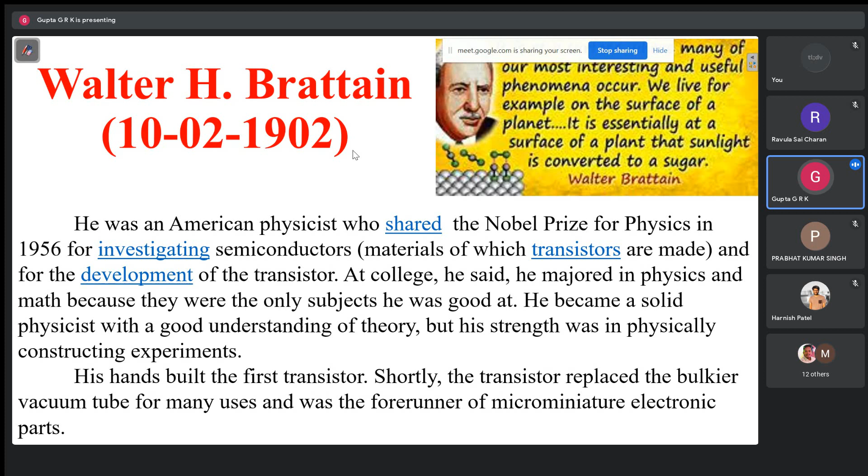Okay, today we will continue with centrifugal compressors. In the last class, we discussed how the centrifugal compressor works, and we compared the centrifugal compressor and axial flow compressor. Then we discussed the nomenclature of the centrifugal compressor. So as I had told you, at the inlet, first it enters the bell mouth to make as much air that can be sucked into it, and to have a smooth uniform flow.

And then there may be or may not be IGV, which are called inlet guide vanes. Then it enters the eye of the impeller. At the eye, first it enters the inducer of the impeller, the inducer part, which is the transition piece that converts the axial flow into centrifugal radial flow. Then we have the impeller, and this impeller also will have an impeller exit, which can be radial, backward curved vanes, or forward curved vanes.

And after the impeller, there will be a vaneless space between the impeller and the diffuser. Then we have the diffuser. And then all this flow is collected in the volute casing with increasing area, and it comes out to the exit. So these are the things we have discussed. And then we have seen how the properties vary across the impeller and diffuser. Mainly, the difference between impeller and diffuser is that the impeller is rotating and we give work to it.

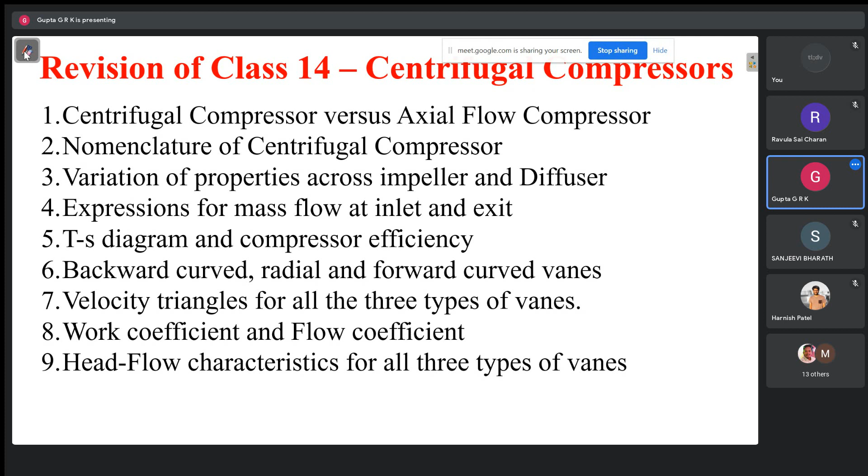Okay, we'll continue that. We are going to introduce some concepts today.

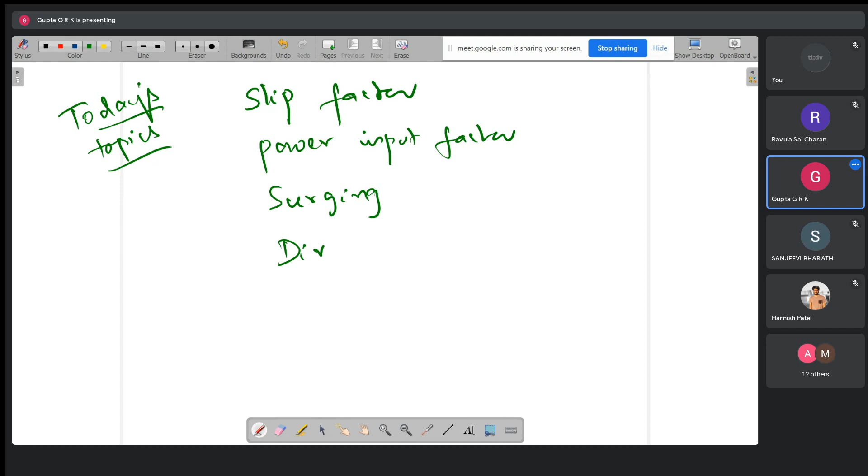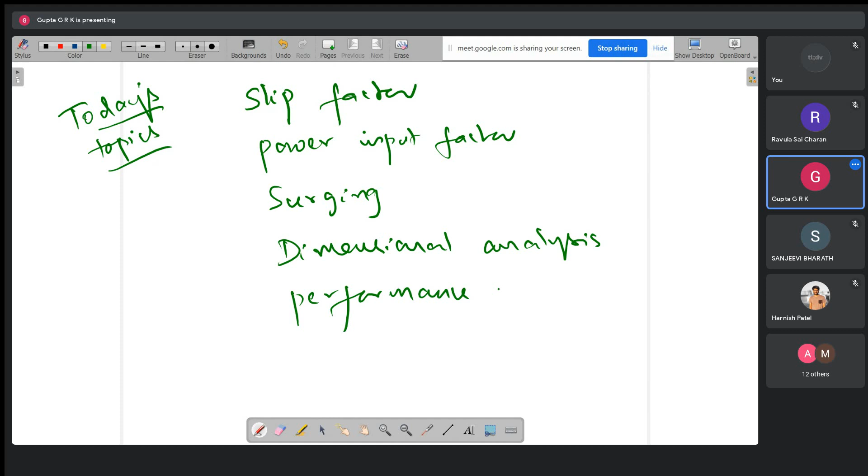One is slip factor, and another is called power input factor. And surge, and dimensional analysis, performance characteristics. These things we are going to discuss. And another thing, prewhirl, this is another one we will discuss. One by one we will go through them.

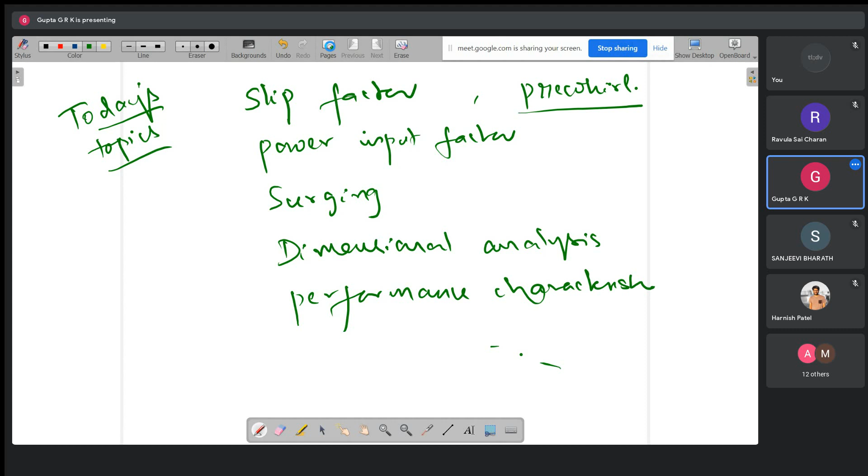So coming to what is called slip factor. See the exit whirl component, which is CW2, we design for a particular value of CW2, because the work is equal to U2 CW2, and it is designed like that. But somehow when it is calculated, or when it is measured, it is always found to be less than predicted.

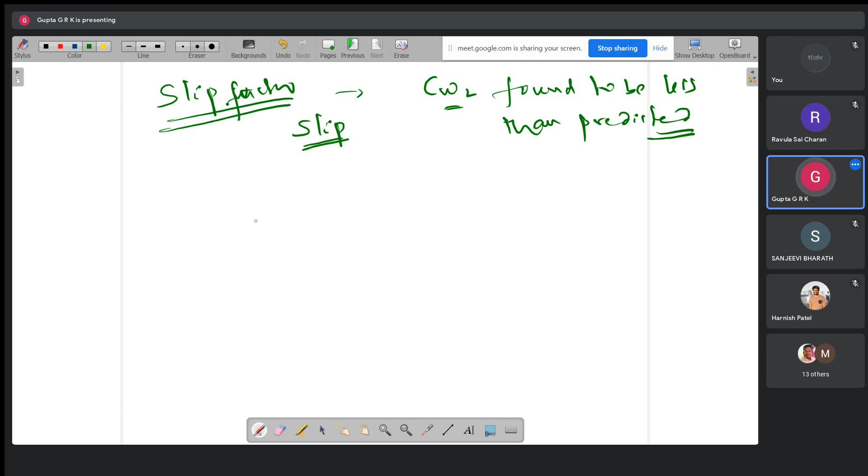So for a few years they didn't understand what was happening like that. Then they came to understand that there is what is called slip. What is this slip?

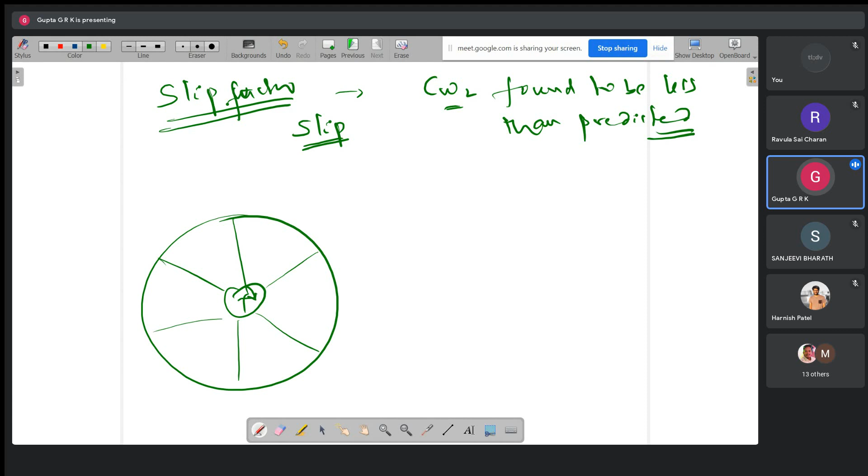If I have something like this, a radial vane impeller, suppose if I take it this way, if it is not rotating, something entering at the center is going to leave like this, this is called through flow. It has to just go out radially outward. But because it is rotating, what happens is...

Because of the inertia, when something is trying to rotate this way, it tries to resist, and there will be an opposite spin on every particle. It's like when a car is going forward, you are thrown backward. So everything will try to spin in the opposite direction because of its inertia, and every particle will have an opposite spin induced due to inertia. All these spins of the particles will form like an eddy.

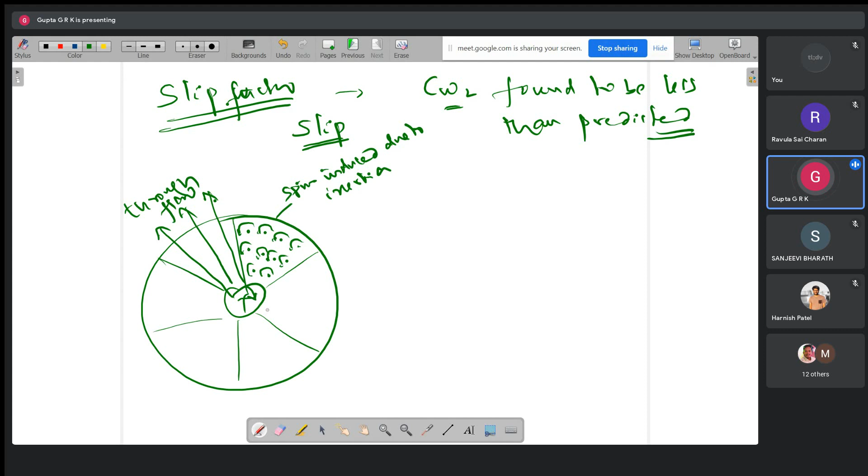So it forms an eddy. This is called relative eddy, due to the induced spin. So it forms like an eddy there. This eddy has velocity in the tangential direction, but in the opposite way. So what happens is, I have the velocity this way, but here the velocity is in the opposite direction.

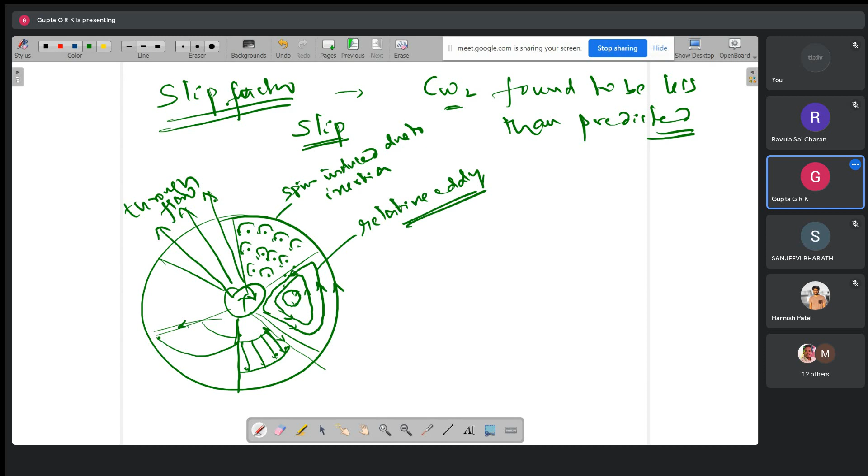So here instead of, suppose if I take the velocities uniform this way for the velocity distribution, but now what happens is, near to this there will be opposite velocity, but near to this there will be induced velocity in the same direction. So there will be less velocity here and large velocity here. The velocity distribution will be like this, instead of this way. Forget about that, it's not that important. The important thing is there is an induced velocity, a tangential velocity, opposite to the direction of rotation.

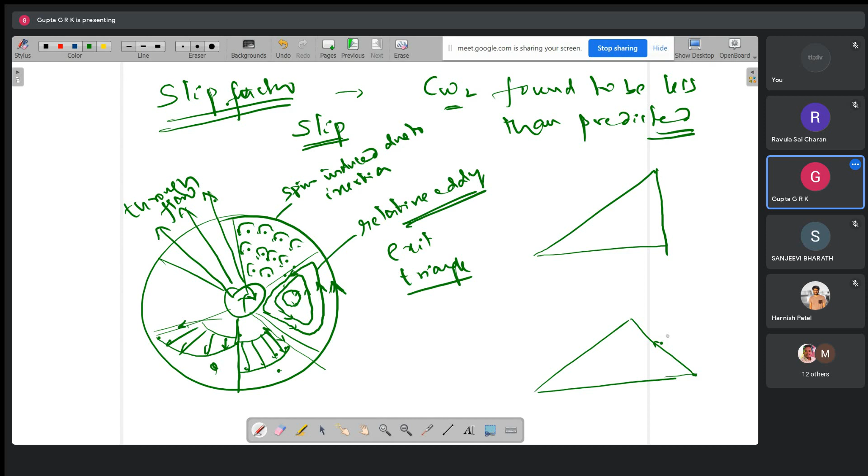So if I have the exit triangle, if it is a radial vane, it is going to be like this. If it is a backward curved vane, here what happens is, because of this tangential velocity which is induced in the opposite direction, instead of this much of CW2, I will have less.

So that induced tangential velocity is called slip velocity, which can be written as Vs. So here this will be Vs. Now this will be C2, and CW2 will be only this. This is CW2 with slip. CW2, yes, I will write.

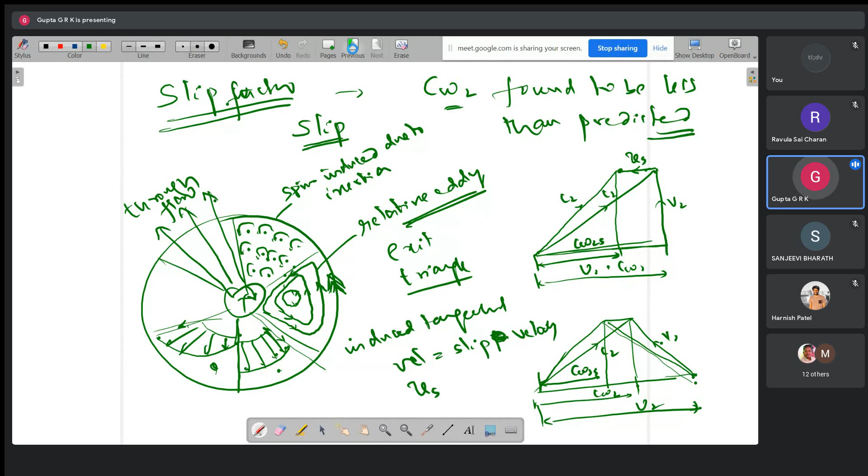In the same way here also, it will be like this. U will not change, right? So CW2 with slip will be less, like this. There will be a decrease in the CW2 we get. So that is defined as what is called slip factor.

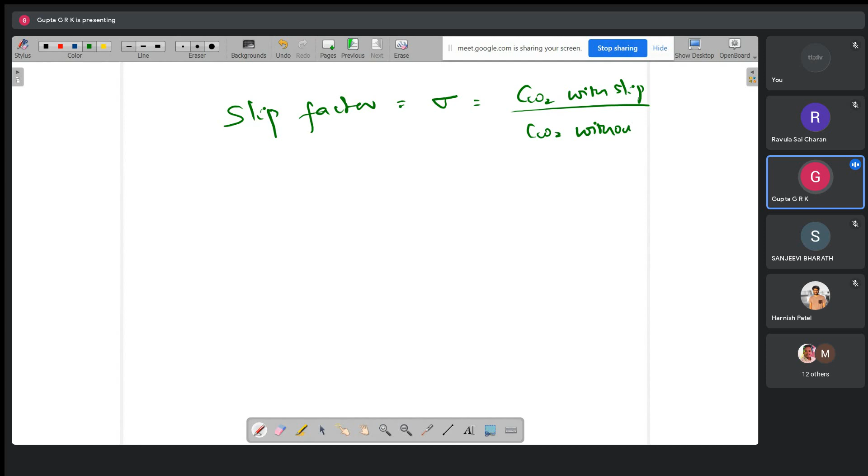This is given by sigma is equal to CW2 with slip and CW2 without slip. It is CW2S by CW2, or CW2 minus Vs by CW2, or 1 minus Vs by CW2. So this is the way they defined what is called slip factor.

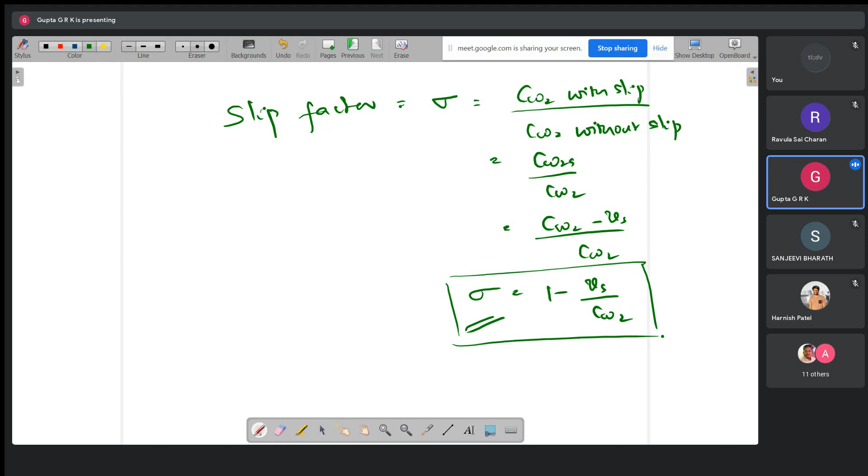But now the question is how to quantify it. It's not enough if you qualitatively understand, because we are engineers and designers. We want to quantify everything. So how to quantify this slip factor? This is done by a scientist called Stodola.

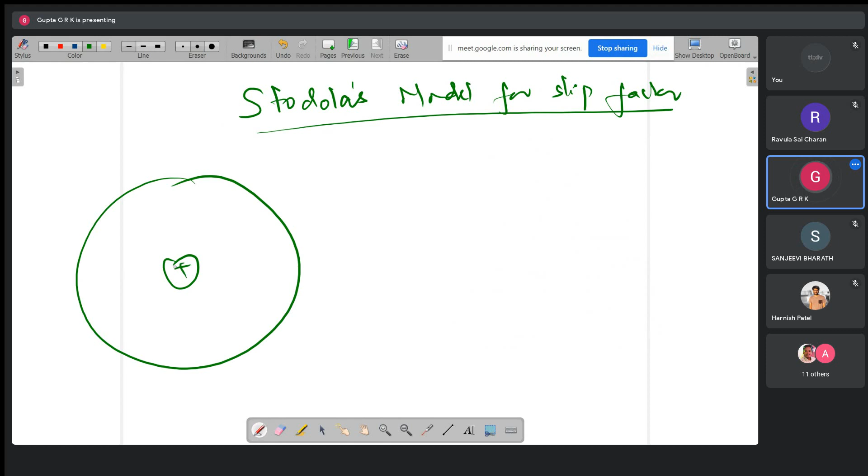So what he has done is he has taken a backward vane thing like this, and he has assumed the relative eddy, the largest circle whatever is possible, he inscribed here. So this is like an eddy motion, rotating in this direction. Its angular velocity will be omega only, and he wants to find out what is r here.

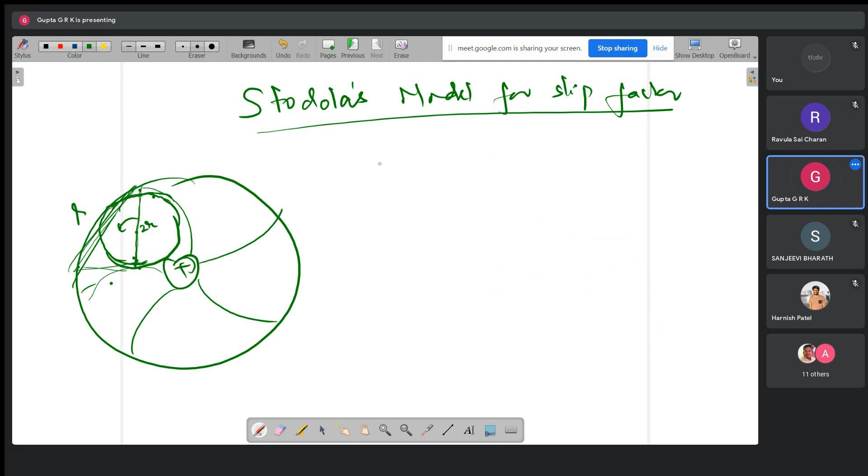So he has expressed this as a right angle triangle like this. If I take the radius of the relative eddy as r, this is the diameter 2r, and this is pitch s, the distance between two successive blades. So s is equal to, because impeller diameter is r2, 2 pi r2 by z. Z is number of blades, S is pitch of the blades.

And R2 is impeller outer diameter, impeller tip diameter, like this. So S is like that. And this angle, this is beta 2, because this is the exit angle, right? So this angle is beta 2.

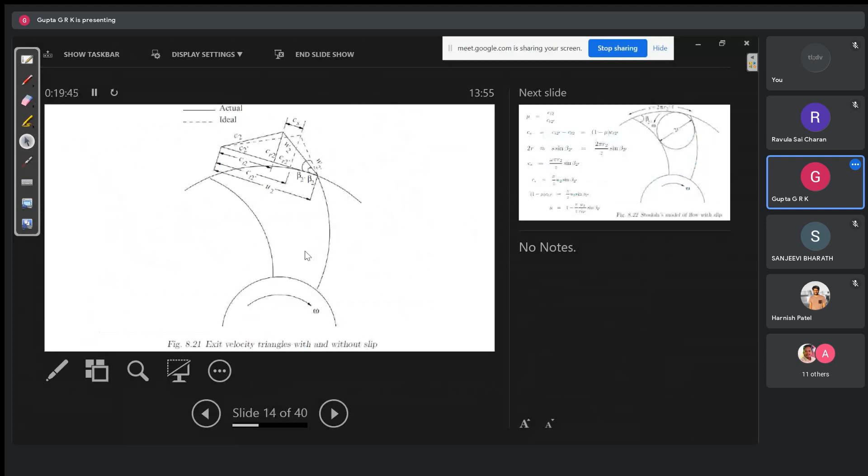And if I take like that, so I can write this as 2r is equal to... this is 2r, yes. If this is beta 2... Okay, he has taken this as beta 2, this is S. So here, because this is beta 2, this is the opposite side, 2R is equal to S sine beta 2, approximately equal to S sine beta 2.

Then Vs is equal to R omega, where R is radius of the eddy. So from this, R is equal to S sine beta 2 by 2. That is Vs. And S is 2 pi R2 by Z. So omega sine beta 2 by 2 into 2 pi R2 by Z. So this 2 goes off, and omega R2 is equal to U2, blade velocity. So this can be written as pi U2 sine beta 2 by Z. So this is slip velocity.

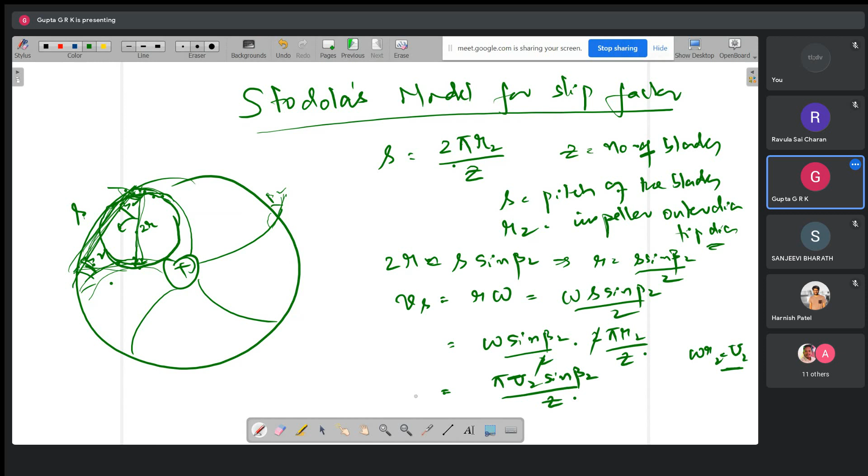And then this is slip factor: 1 minus Vs by Cw2. That is 1 minus pi U2 sine beta 2 by Z.

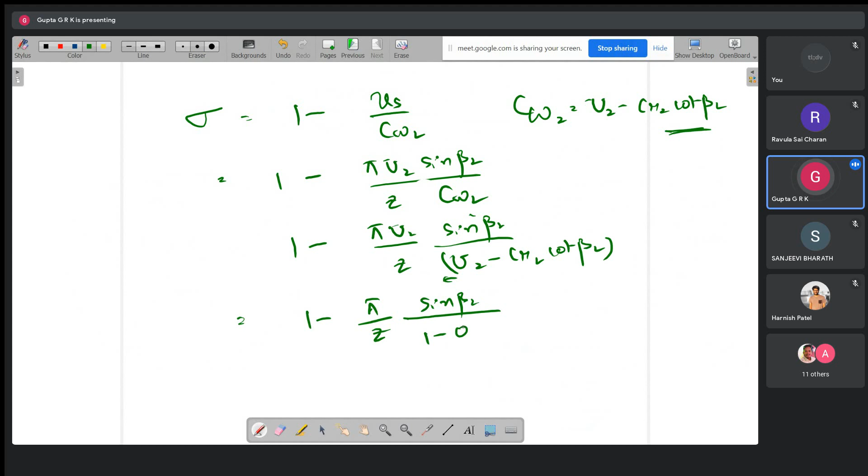Cw2 is equal to U2 minus Cr2 cot beta 2, as we saw yesterday. If I substitute that here, and similar to yesterday, take U2 common and cancel U2 in numerator and denominator, this can be written as 1 minus pi by Z sine beta 2, divided by 1 minus phi 2 cot beta 2.

This is Stodola's model for slip factor, used for quantification. For radial vanes, beta 2 is equal to 90 degrees. So sigma will be equal to how much? Phi 2 cot beta 2 will be 0 and sine beta 2 will be 1. So sigma is 1 minus pi by Z.

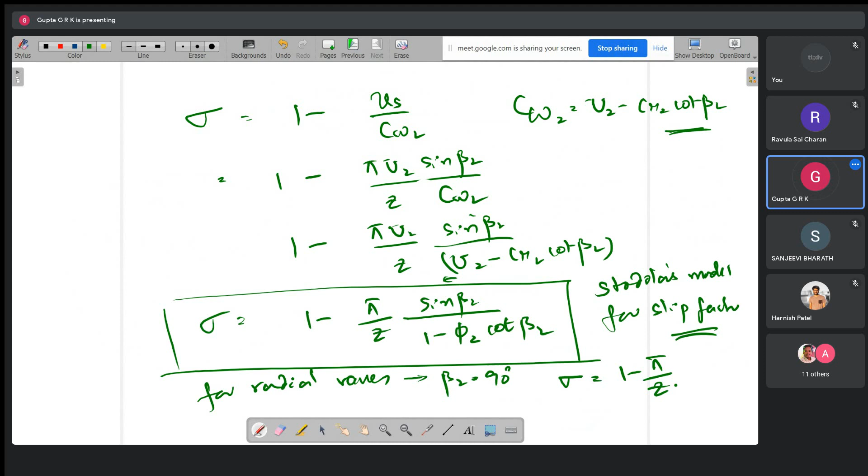This is for radial vanes, 1 minus pi by Z. And for backward curved vanes, where beta 2 is equal to 45 to 90 degrees, Stanitz has come up with a formula: sigma is approximately equal to 1 minus 0.63 pi by Z.

This is an empirical formula, approximately you can use it like this. This is about the slip factor, and usually sigma is approximately 0.9. If you want to do rough calculations, sigma is 0.9. So in the problem, if it is given, you can use that value. If it is not given, you can take sigma as 1 only, for efficiency calculations and so on.

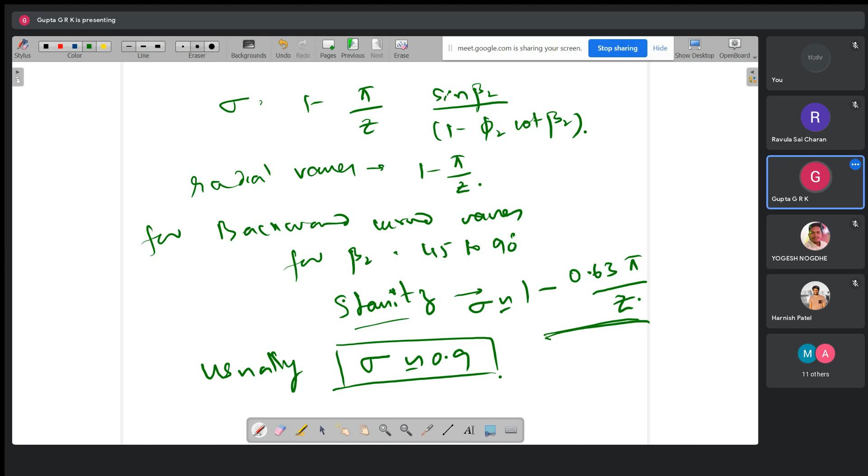So this is about the slip factor. Now there is another thing called work input factor. Suppose for some pressure ratio you have to supply some work, but because of disk friction, sometimes called windage loss, the required work is more. So here the required work is written by multiplying by what is called the work input factor.

This is usually represented as small psi. The work coefficient is different, that is capital psi, and this is small psi, just a notation. The work input factor is approximately taken as 4% extra work, so psi is equal to 1.04. So here, if you take the work, W is equal to U2 CW2 minus U1 CW1. If the inlet is purely axial, CW1 equal to 0 and W is equal to U2 CW2.

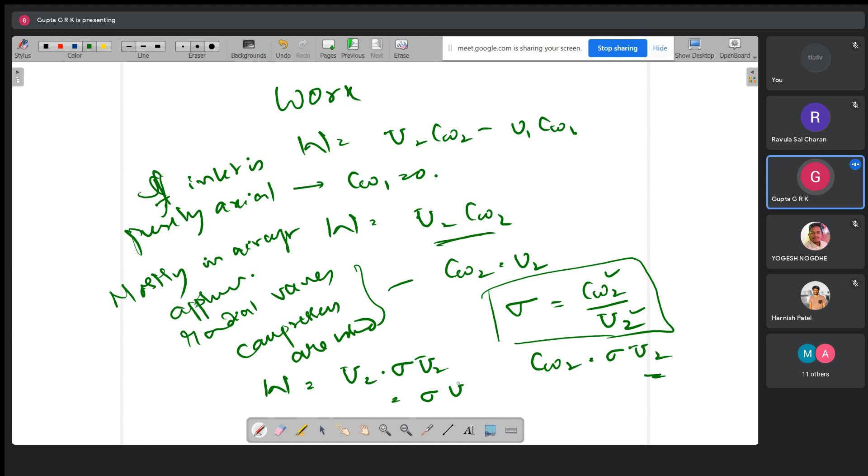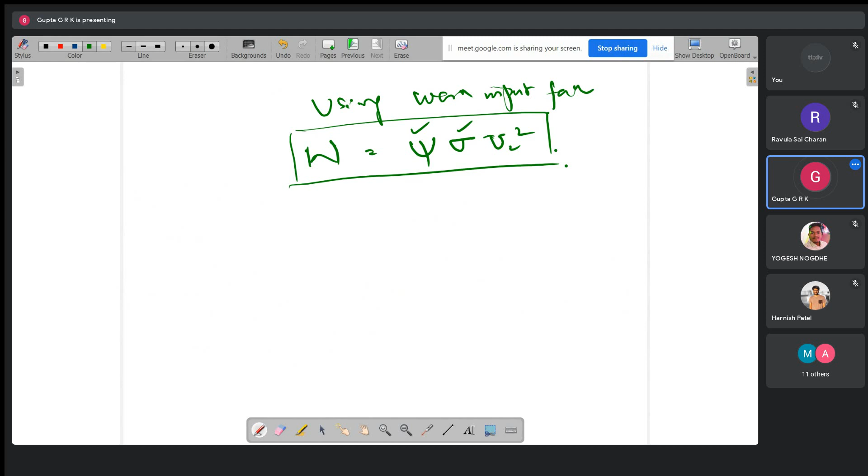So here W is equal to, if U2 into sigma U2, which is sigma U2 square. But using the work input factor, W is equal to psi sigma U2 square. This is the expression used. As I told, if psi is given you use it, if sigma is given you use it, otherwise you take it as 1, default values. But otherwise you have to use those values. So this is the work expression.

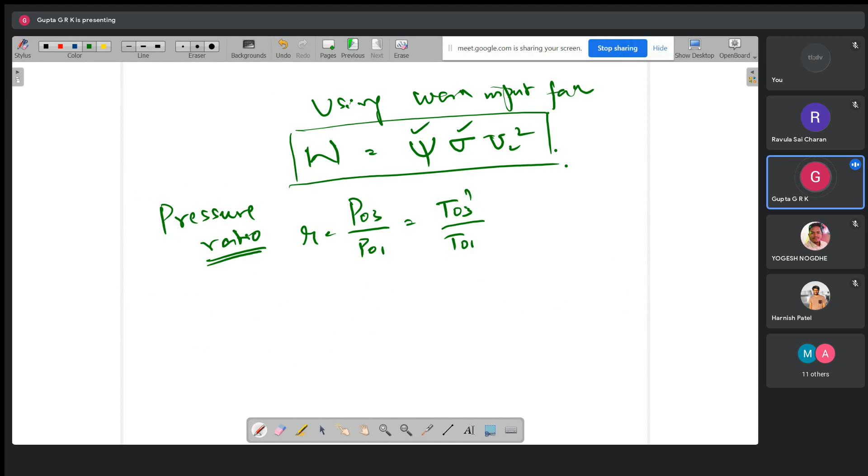But when you come to pressure ratio, yesterday we had derived this: P03 by P01, R is equal to T03 dash by T01, is equal to 1 plus eta C W by Cp T01, to the power of gamma by gamma minus 1. This is the way we defined it. So this W can be substituted here. So R is equal to 1 plus eta C psi sigma U2 square by Cp T01, to the power of gamma by gamma minus 1. This is an important relation.

This is the expression for pressure ratio across a compressor. The previous expression is same for centrifugal and axial compressors. But W is equal to psi sigma U square is only for centrifugal compressors. So this is true for centrifugal compressor, but the pressure ratio expression is true for both centrifugal and axial flow compressors.

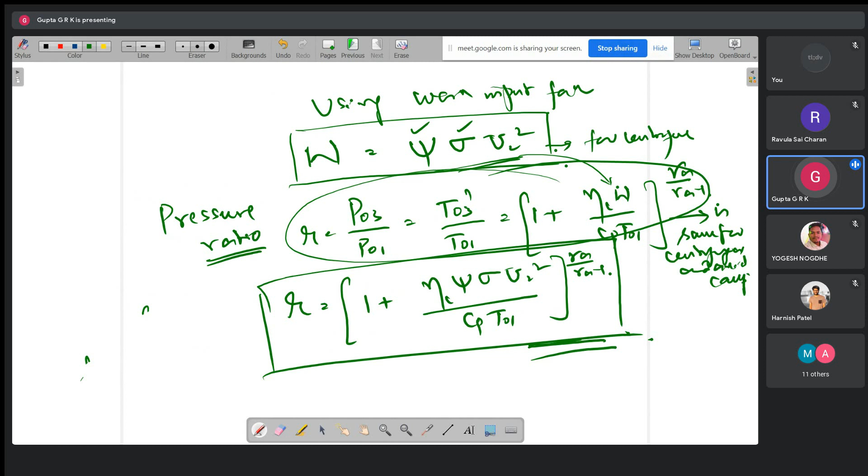That we are going to use in the next chapter. Coming now to this R here, so what are the factors affecting pressure ratio?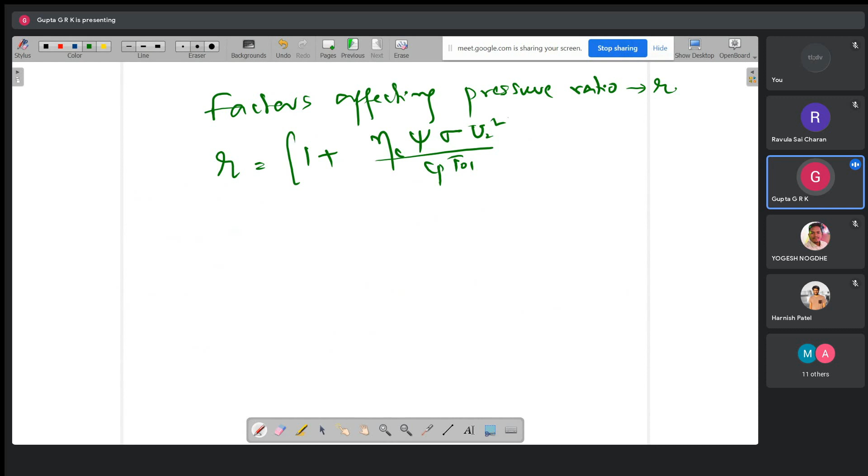Pressure ratio R. So we get R is equal to 1 plus eta C sigma psi U2 square by Cp T naught 1, to the power of gamma A by gamma A minus 1.

So if you see here, eta C, I cannot do anything. It is efficiency of the impeller or the compressor, so this comes by fabrication. And psi, this is due to disk friction, which I cannot do anything. And slip factor also comes by nature, because it is rotating there will be opposite spin, induced velocity, everything will be there. I cannot do anything.

Cp and gamma depend on the fluid properties. So if you change fluid, the pressure ratio changes, but if it is air, I don't have anything to change there. And T01 is the ambient temperature, nothing can be done about it.

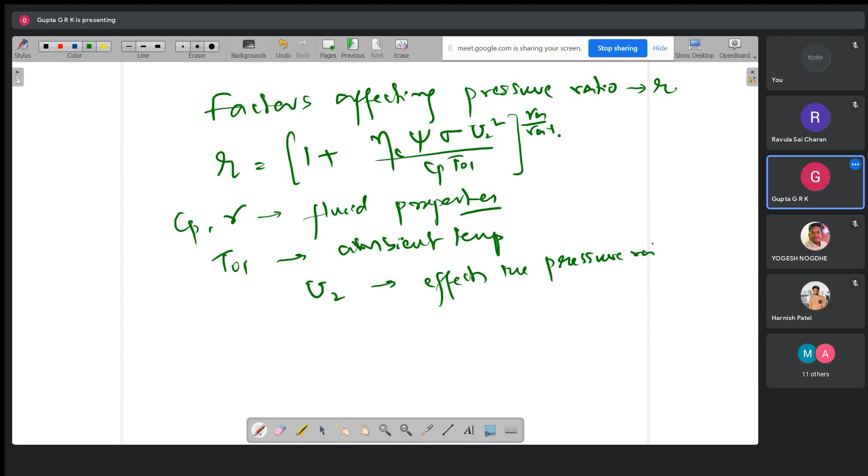So there is only one component, U2, that affects the pressure ratio. As U2 increases, pressure ratio increases.

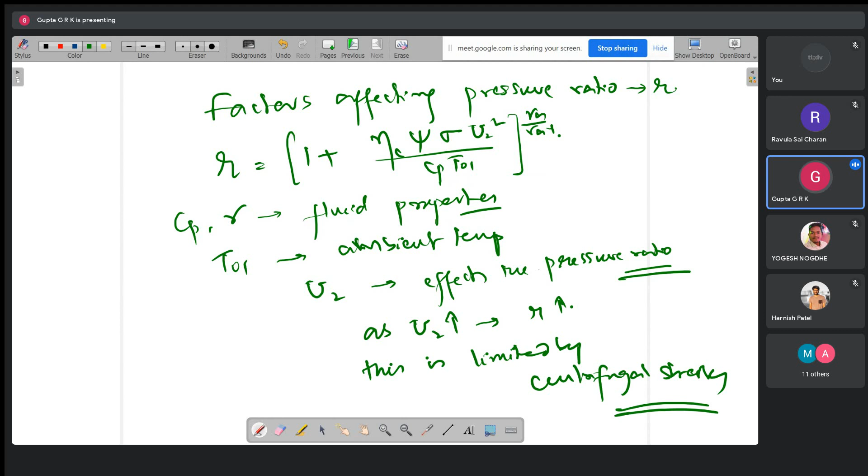How much can we increase U2? This is limited by centrifugal stresses. So approximately U2 max is 350 meter per second with steel blades.

Mild steel. But it can be increased up to 450 meter per second with titanium blades, which can withstand higher stresses.

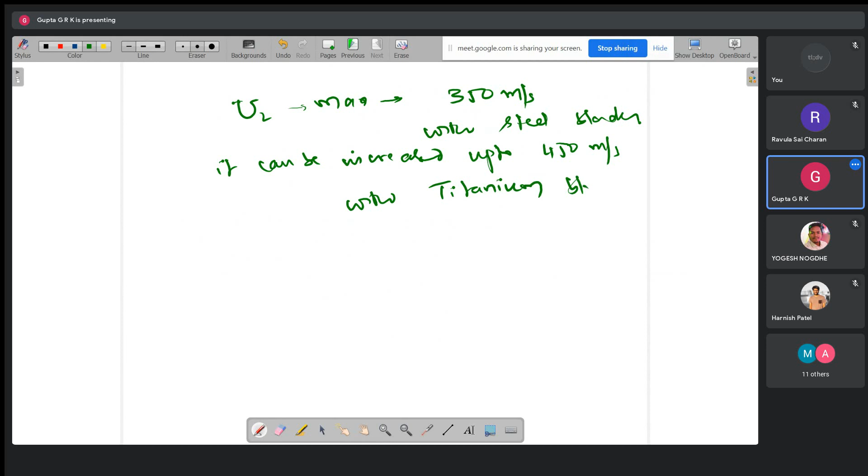Okay, this is the way. So R equals 1 plus eta C sigma psi U2 square by Cp T naught 1, to the power of gamma A by gamma A minus 1.

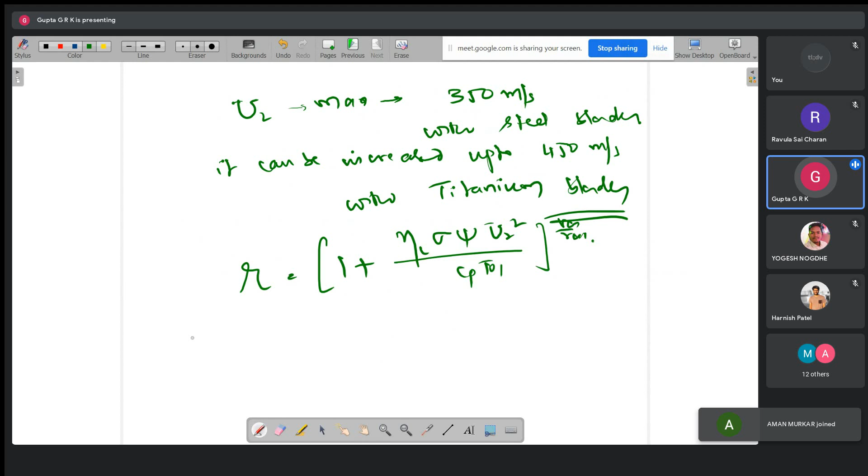So eta C is approximately 0.85, that is 85%. Sigma I told is approximately 0.9. And psi approximately 1.04. Cp is 1.005 kilojoule per kg Kelvin if it is air, and gamma A is 1.4. So all are fixed, and T01, the ambient temperature, you can take as 300 Kelvin.

So you can find out what pressure ratio I can produce. Anybody, if anybody has a calculator, can you do it? Is anybody trying? Okay, you try with 350 and also with 450.

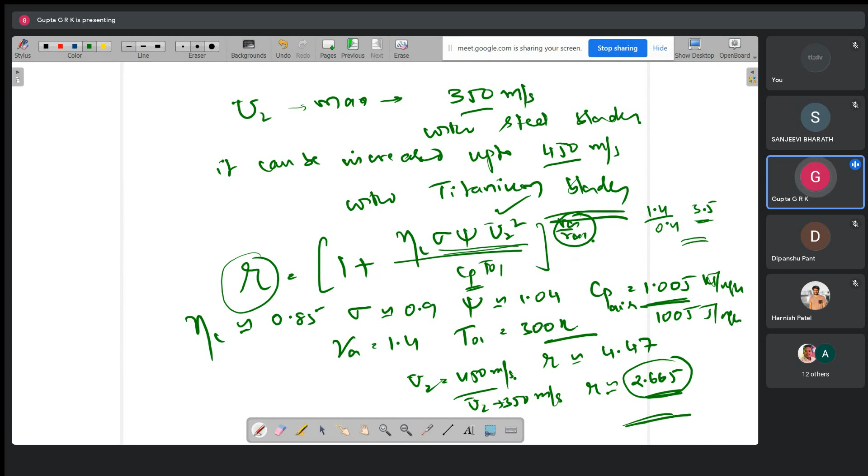Okay, this is about this. There is one more thing I was telling about pre-whirl. This is related to what is called IGV, inlet guide vanes. So here, when I have something like this, so this is CA.

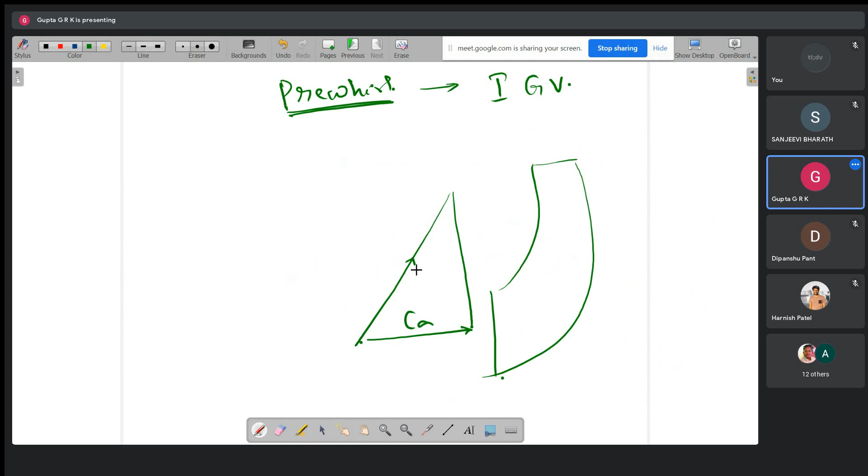Okay, so this is C1 equal to CA1, V1 and W1. This is the inlet triangle, as I was telling for the turboprop. If the inlet is coming axially like this, because of the rotation of the blade, I will have V plus U equal to C. So I'm going to get a triangle like this.

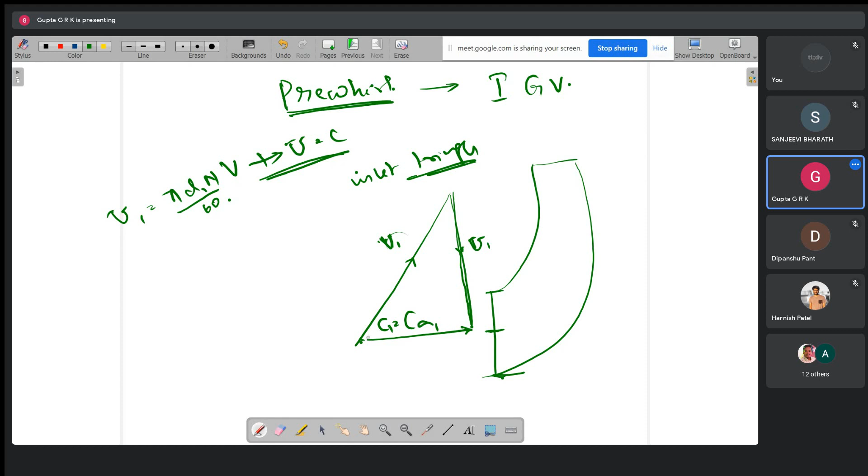So as I was telling in the turbine case, the same thing may happen here. This U1 is pi D1N by 60, and D1 changes, right? D1 mean is here, but hub to tip, the velocity changes. So if I take for hub, it may come like this, and for mean, it may come like this, for tip, it may come like this. So the inlet triangle changes from hub to tip.

Am I clear about that? So this is U1 hub, and this is U1 mean, and this is U1 tip. So V1 also, V1 tip is this, this is V1 mean, and this is V1 hub. Am I clear about this?

So beta 1, this is beta 1 tip, this is beta 1 mean, this is beta 1 H. So the inlet angle changes, the relative velocity angle changes. So my blade also should be designed in such a way that at every radius, it goes smoothly into that. So because the inlet angle is changing from hub to tip, it has to have a twist. I have to bend it in such a way that at every radius, it goes smoothly over that. Am I clear about this particular concept?

Inlet is axial, C1 equal to CA1, no CW1, no whirl component. Purely axial inlet.

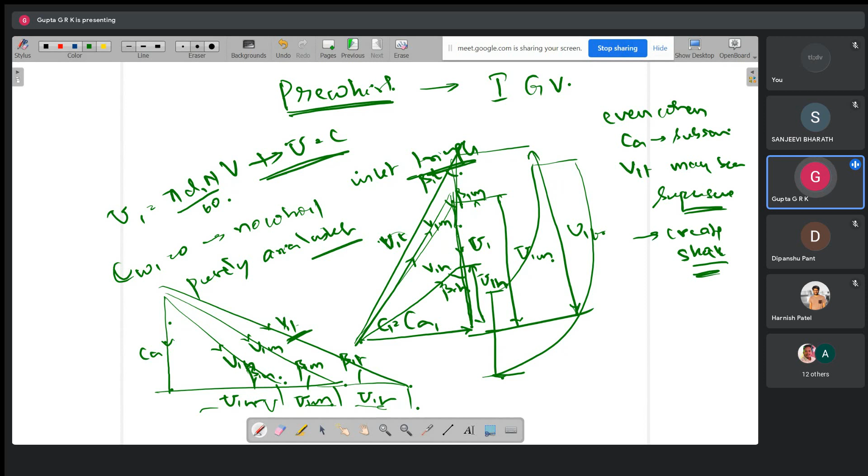So the critical one is the Mach number with respect to V1T, that is V1T by root of gamma R T1. I have to check this, whether this is below or beyond, above Mach number 1.

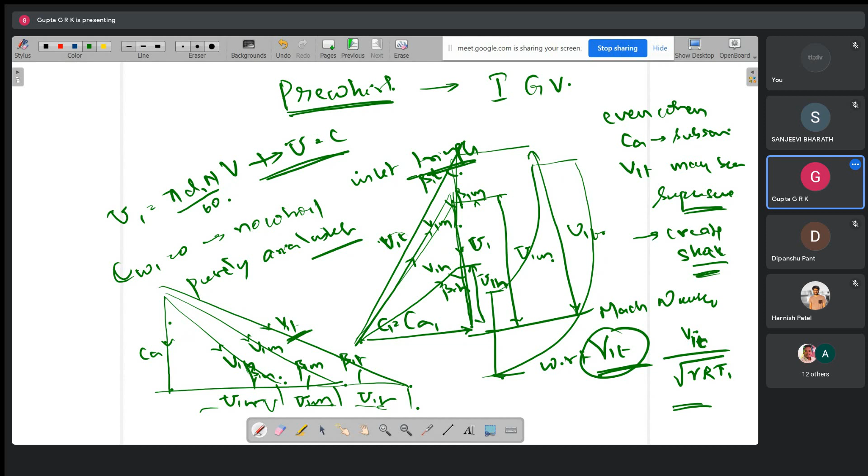So if you assume or expect that there may be a shock, I have to do something about it. Here, mass flow is equal to rho 1 A1 CA1. I don't want to change the mass flow, same mass flow is coming, right? So what I do is I put what are called IGV.

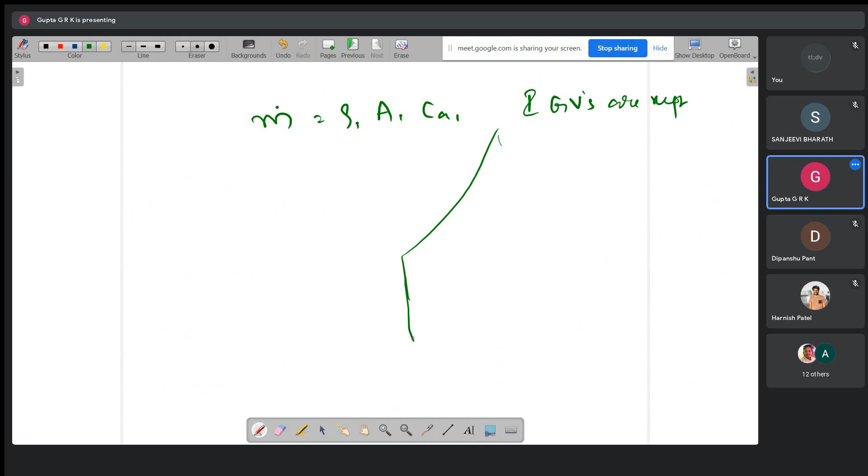What will the IGV do? So at the tip, suppose I have this velocity triangle. What I do is I put an inlet guide vane in such a way that it sends the air with a little bit of deflection. It introduces a whirl component. So it comes like this, instead of coming axially. This is coming axially before the IGV, but it bends the flow like this. This is called the angle of pre-whirl, because it introduces some whirl component.

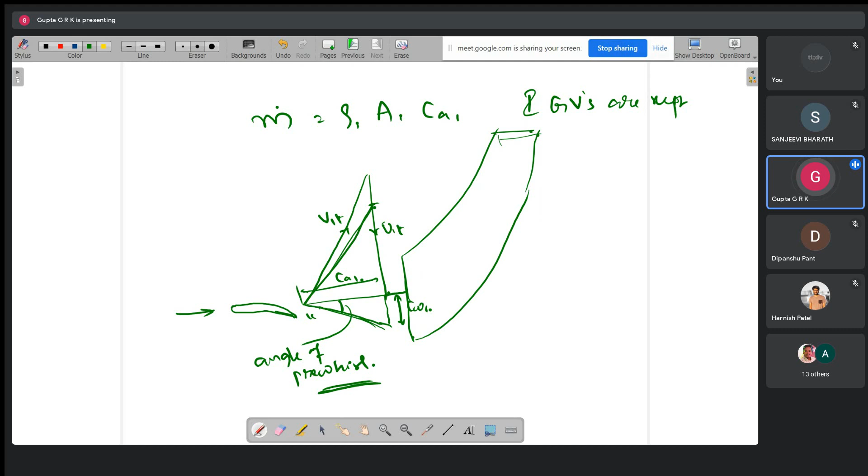And now this is CW1 and this is CA1. CW1 is the pre-whirl component or whirl component at the inlet. So because of that, what happens now? U1T will be the same, right? So my triangle will change to this, so V1T gets reduced, because the base of the triangle will not change since the speed is same. So my triangle gets modified and V1T gets reduced. So this is V1T with pre-whirl, less than V1T when C is axial, like this. Is my point clear?

Yes, sir. So IGVs are used to introduce some whirl component at the inlet, which is called pre-whirl.

So my R is equal to 1 plus eta C psi, eta CW by CPT naught 1, to the power of gamma by gamma minus 1. So this W gets reduced, so R gets reduced. The pressure ratio that is developed gets reduced. Is my point clear?

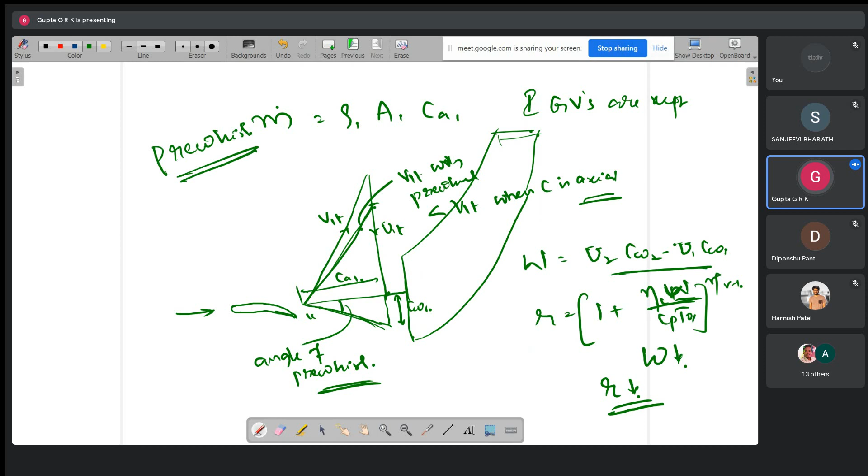Okay, then we will see what is dimensional analysis. For doing dimensional analysis, as I told, whenever I want the characteristics of any experiment, if there are more number of variables, I'm going to get more number of graphs. To reduce the number of graphs, I always do the dimensional analysis and draw the graphs between dimensionless parameters. That reduces a lot of work and experimental burden.

But we have to be very careful about what are the performance parameters. At the inlet, I have pressure and temperature. And at the exit, the pressure and temperature. And then the mass flow. And also the size and the speed.

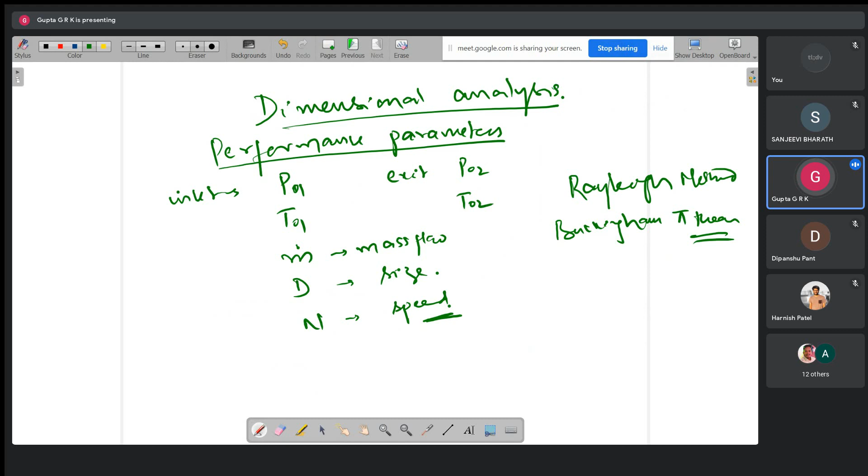Like this, okay. So if I want to do that, I will not do all those things. With simple logic, I will do it. So P01, T01, P02, T02, D, N, and mass flow.

So first we have to find out what are the dimensions. Can you tell me in MLT? What is the dimension for pressure? ML minus 1, T minus 2. Do all of the people agree?

Yes, sir. And here for temperature, because it is coming another one, like MLT theta also will be there. Instead of that, I will keep RT not 1 and RT not 2. If it is RT not 1, so what is going to happen to this? Anybody try? L2, T minus 2. Yeah. This is like velocity square.

So P by rho is equal to RT, right? And P by rho is C square by 2, right, if you remember Bernoulli's equation. So these are the units of velocity square, L2 T minus 2, meter square per second square. So this is also L2 T minus 2.

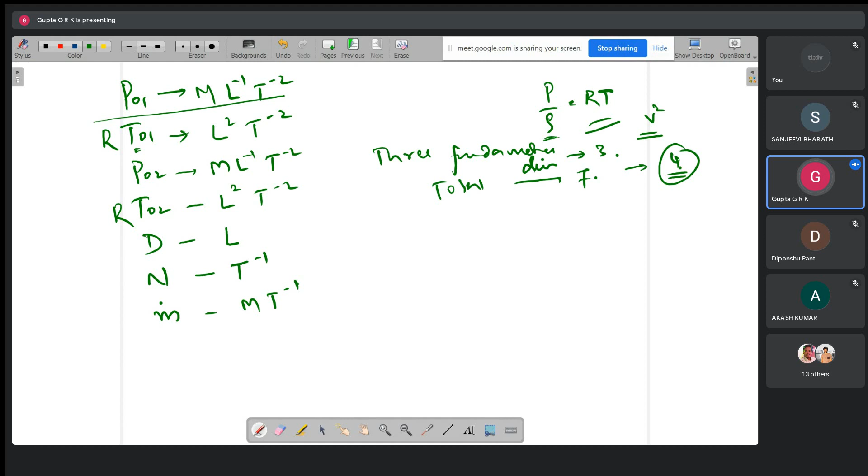So I will take P01 because this is the inlet condition, right? I am taking that as one, and RT01 having L and T only, there is no M. Now I have to take only L, so this I will take. So P01, RT01, and D.

With these three, I have to take the others, because 3 are over, the remaining 4. With all the 4, I have to take with each one non-dimensional parameter. So if I take P02...

ML minus 1 T minus 2 by ML minus 1 T minus 2, I am going to get one non-dimensional parameter. This is R, pressure ratio, I will write as P03 by P01. Okay, R, pressure ratio is one of them.

And then if I take RT02 and divide this RT02 by RT01, I'm going to get another, the second one. This is temperature ratio. Actually, this is replaced by efficiency of the compressor.

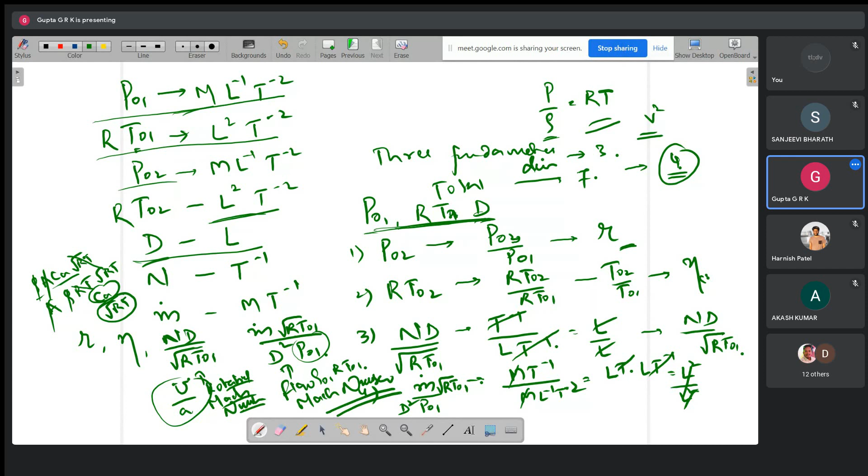So if you see here, pressure ratio, efficiency, and ND by root RT01, and m dot root RT01 by D square P01. This is the way we get these four non-dimensional numbers. But here, if I take air as the working fluid, then R is constant.

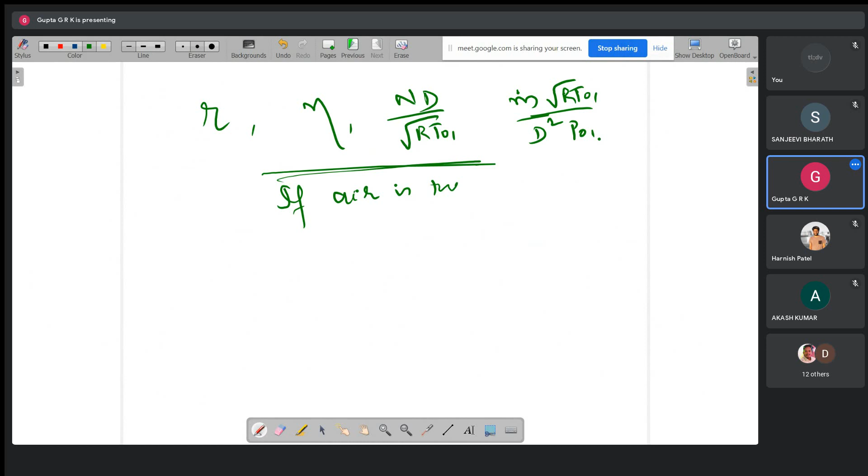Okay, and if experiments are done on the same impeller, D is equal to constant. So if I eliminate them, I will get R, efficiency, n by root T naught 1, m dot root T naught 1 by P naught 1. Okay, these are the parameters we will consider.

This is something confusing sometimes, because if you see the hydraulic pumps or turbines, we use specific speed. Is specific speed a dimensional number or non-dimensional number? Non-dimensional numbers. But if you see, the specific speed for pumps is n root Q by H power 3 by 4. It's dimensional then. This is for pumps. And n root P by H power 5 by 4 for turbines. These look dimensional, right?

But actually, they are not dimensional. They are derived from non-dimensional things. Actually, it is not H power 3 by 4 or H power 5 by 4. It will be gH, like that. And even diameter also will be there in the calculation. So assuming g is constant, we remove that, and D is constant, we remove that, and finally we come with n root Q by H power 3 by 4 and n root P by H power 5 by 4. So it comes from non-dimensional groups, but it looks like dimensions because we are neglecting those things which are constants. Am I clear about it?

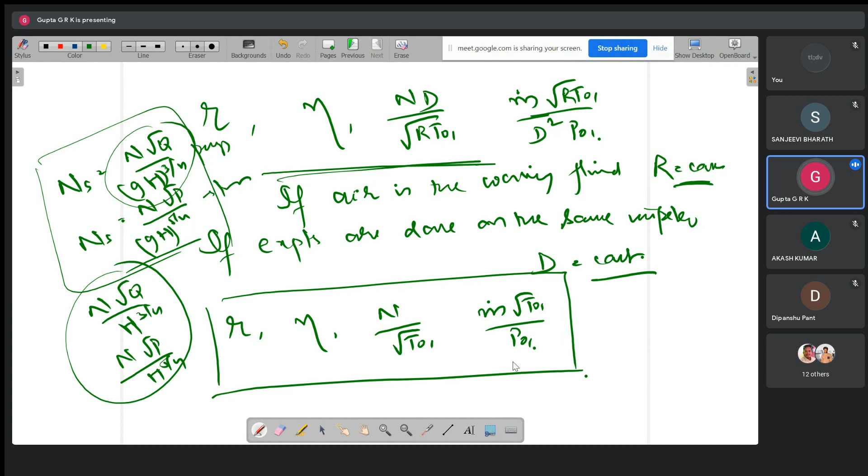Yes, sir. Okay, so these are the performance parameters. So between this, actually, I have to draw the graphs. So if I do the performance characteristics, and there are 4 parameters, how to do that.

So what we do is, I will take mass flow here and pressure ratio. Okay, I can take P0 3 by P0 1, actually pressure ratio R is equal to. If I draw this, what I'm going to get is a graph like this. Okay, for a given pump with air. So this is the way we get.

But here, what happens is, though it comes like this, the range on this side is unstable. We cannot run this side very much. So if you take this side, as mass flow decreases, pressure increases. As I was telling previously, P is equal to gamma QH, and Q and H are inversely related. Q is mass flow and H is pressure ratio.

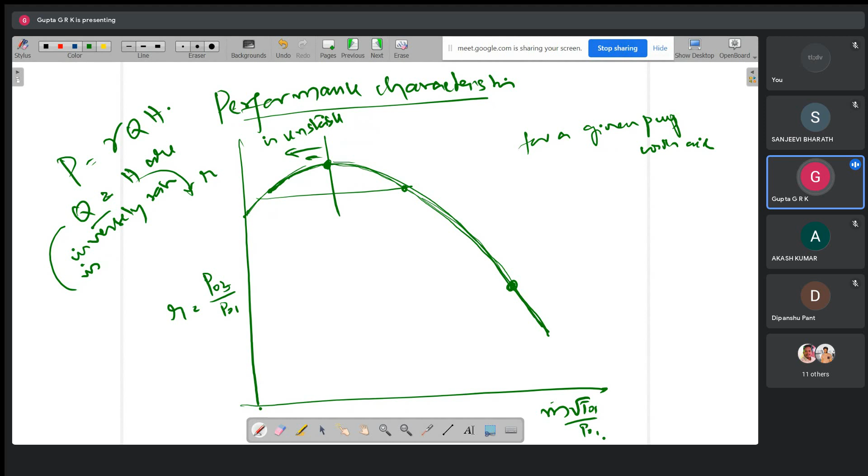So what happens is, it will try to have a reversal of flow. So reducing means it actually tries to obstruct, and there will be a reversal of flow. But the flow is coming this way. So it tries to reduce here, but that flow and the new flow that comes, it just shifts to this point. But again, the flow cannot go because the valve is closed, so it tries to go like this, the mass flow decreases. So actually there will be complete oscillations of flow taking place.

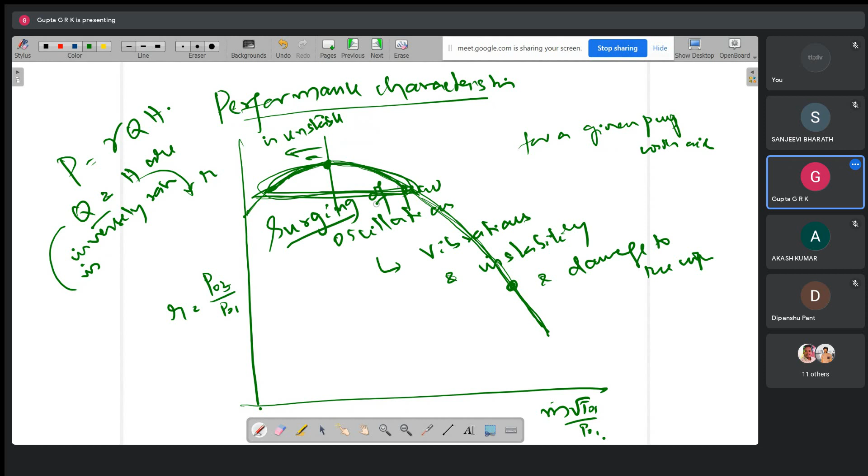And this results in vibrations and instability and damage to the impeller. And this is called surging. This happens both in the pump or compressor, centrifugal or axial compressor, whatever it is. So this is called surging. Surging is an unstable flow which creates a lot of oscillations in the flow, reversal of flow, and damage to the impeller.

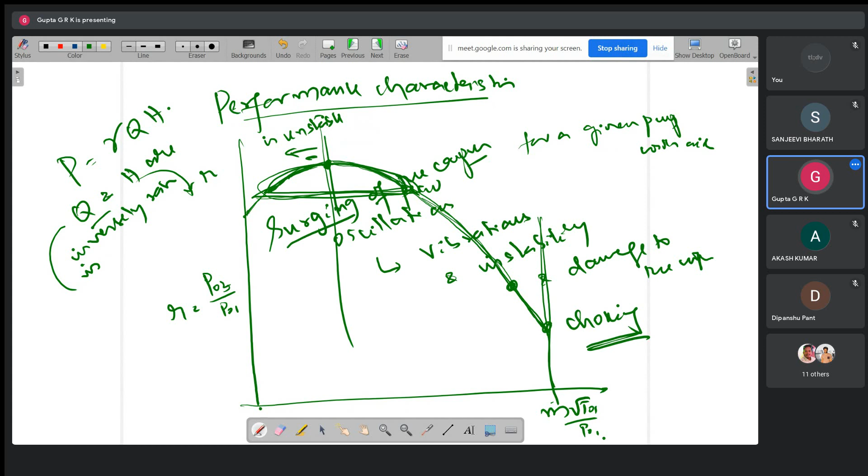Okay, this is surging. So what happens is, for a particular speed, there is a particular range of flow that can take place. And here also, there is what is called choking. I cannot increase the flow beyond some point, so that is called choking. So the complete operation range is between surging and choking. Okay, so here, if I draw it for different speeds, it comes like this.

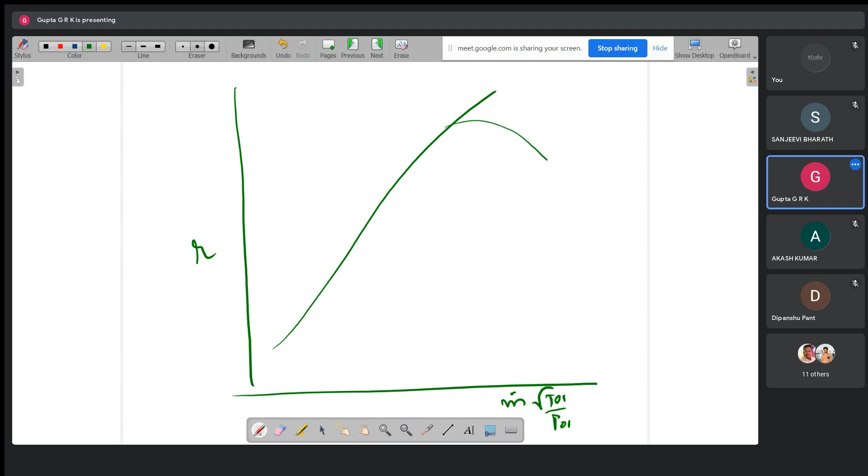This is the way. For different non-dimensional speeds, I'm going to get curves. At this particular speed, I get like this. Another speed I get like this. Another speed I get like this. Another speed I get like this.

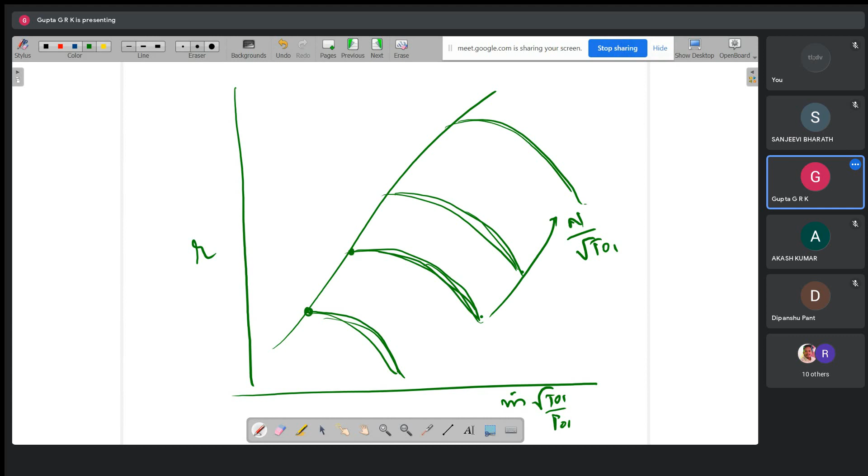Okay, and all are stopped by the surging point. This is called the surge line.

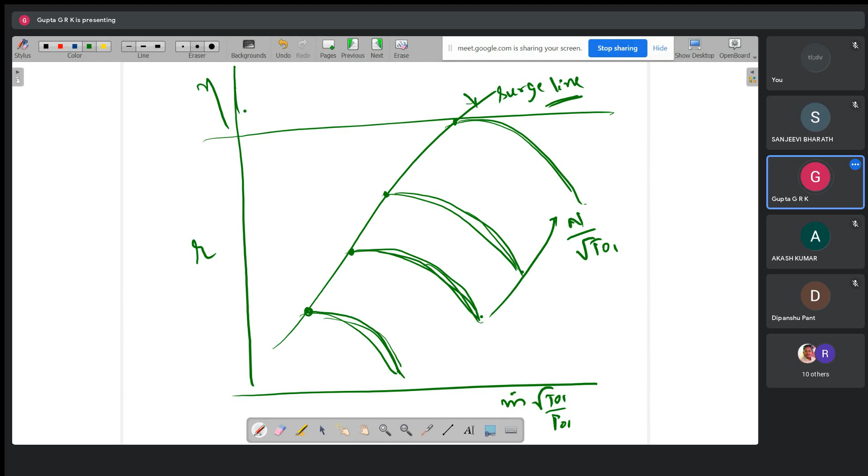And there is one more parameter left out, that is efficiency. For this curve, correspondingly, I will get a curve like this, efficiency curve, between this particular range. And for this, again, for this particular range, I'm going to get another efficiency curve like this. I'm going to get efficiencies with respect to speeds.

Okay, these are the centrifugal compressor performance characteristics. Is this clear?

At every particular speed, I'm going to get a curve like this, and different speeds will get different curves. On the left side, it is restricted by surging. On the right side, it is restricted by choking. So only a small range of mass flow is allowed.

So actually at low mass flow, I cannot run it much time. When you are starting, mass flow will be less. I have to quickly increase the mass flow so that it will not be in surging for more time. So you cannot avoid it, but you can just go fast over it, and then you can have the running between these two mass flows.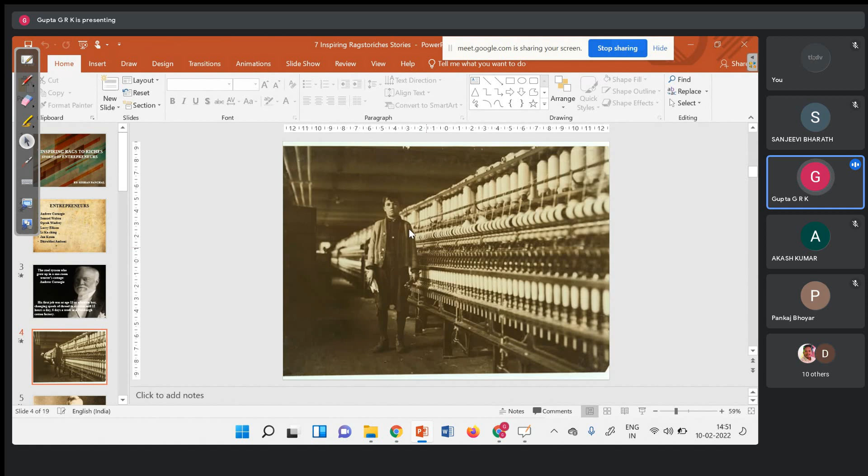His first job was at age 13 as a bobbin boy, changing spools of thread in a textile mill. Bobbins, that's spools, he used to change it. That is the way he worked, changing spools of thread in a cotton mill 12 hours a day, 6 days a week in a Pittsburgh cotton factory. So that was his background. You can see him, Andrew Carnegie, working in the spinning mills.

And by 1889, Carnegie Steel Corporation was the largest of its kind in the world. He donated millions to the New York Public Library, established the Carnegie Institute of Technology in Pittsburgh, which is now known as Carnegie Mellon University, created the Carnegie Foundation for the Advancement of Teaching, and formed the Carnegie Endowment for International Peace. So that is the man he became later.

So there is another person we'll talk about, the retail giant who had to milk cows and deliver newspapers, Samuel Walton. He milked the family cow, bottled the surplus, and drove it to customers, and afterwards would deliver Columbia Daily Tribune newspapers on a paper route. In addition, he also sold magazine subscriptions. That is the way he grew up.

Forbes is the magazine that tells who is the richest in the world, giving the ranking: first richest, second richest, like that. Forbes ranked Samuel Walton as the richest person in the United States from 1982 to 1988. At the time of his death in 1992, he had 1,960 Walmart stores, employing 380,000 people, and clocked annual sales of about $50 billion. So he grew to that stage.